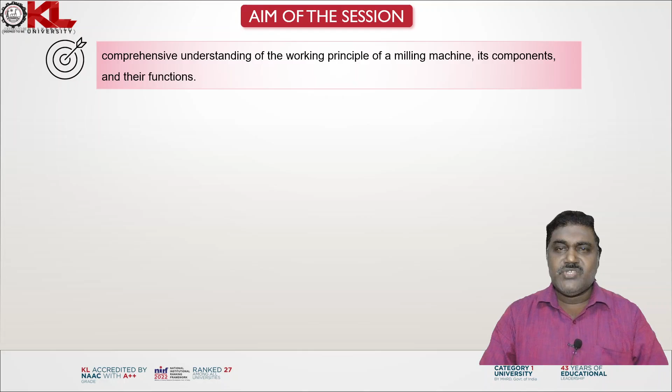In this video, I am going to explain the milling machine working principle. The main aim of the session: a comprehensive understanding of the working principle of a milling machine, its components and their functions. Instructional objectives: this session is mainly designed to explain the working principle of a milling machine, including its basic operations, and to familiarize participants with the various components of the milling machine and their functions.

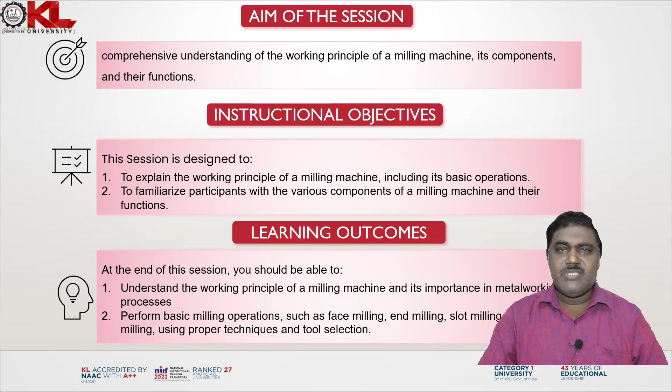The learning outcomes: at the end of this session, you should be able to understand the working principle of the milling machine and its importance in metalworking processes, and perform basic milling operations such as face milling, end milling, slot milling and profile milling using proper techniques and tool selection. Now look at this diagram.

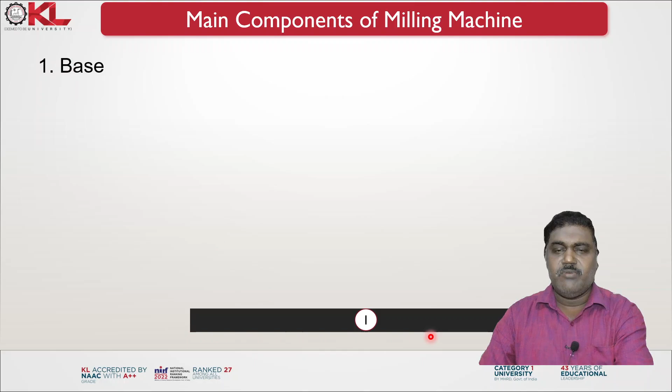See the first part, that is the base. This is the bottom part of the machine, the base, and the second part is the column. The column is mainly used for supporting the overhanging arm of the milling machine, and all the driving mechanisms are incorporated inside the column. It's supported on the base.

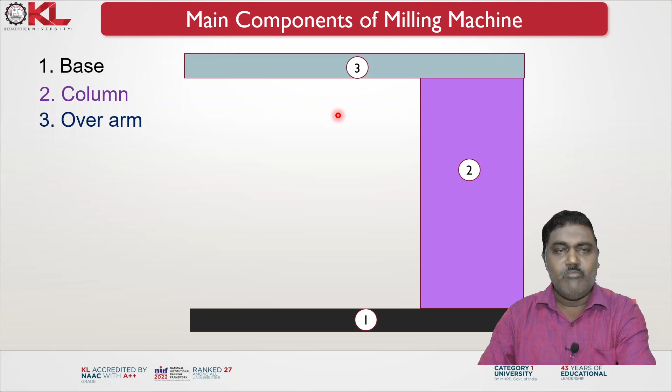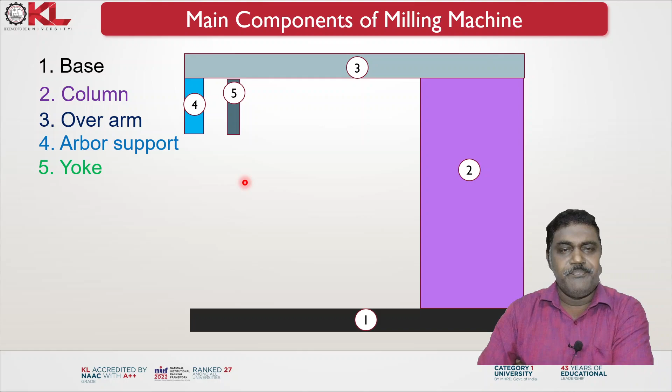Next, the overarm. Part number 3 is the overarm. This overarm is mainly used for supporting the milling arbor at one end, and the other end is supported at the column, and on the arbor the milling cutter will be mounted. Here there is the arbor support. This arbor is overhanging and is supported by means of this device. Here this is the yoke, which is used to support the arbor of the milling machine.

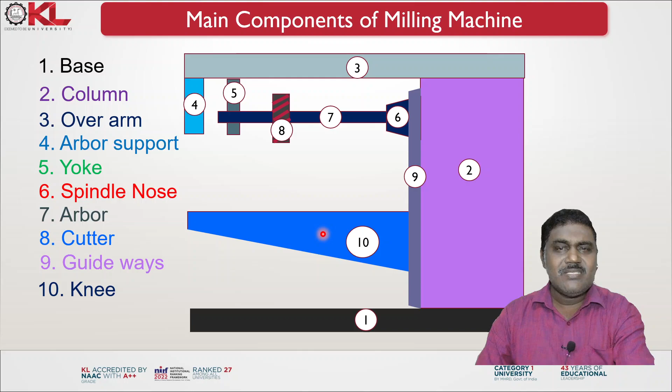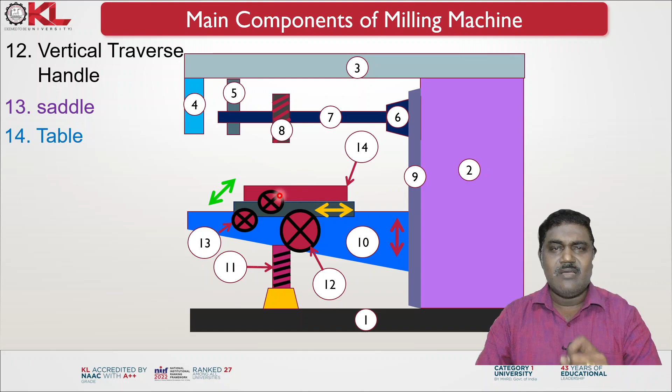Okay, now you can observe here the three directions: the vertical direction, horizontal direction and cross direction. So with the help of these three directions, you are able to accommodate any size of workpiece under the milling cutter, and you can move the work along the horizontal direction and cross direction in order to cut the workpiece to the required profiles. These movements are accommodated in the machine.

Now we can see that on the top of this table we are mounting the machine vise, where the job is fixed. With the help of this machine vise, fix the job, and you can accommodate different sizes of job. It's variable, because once this hand wheel of the vise is moving, it can accommodate more sizes of workpieces.

Once the workpiece is fixed, this entire setup can move up and down up to the tool with the help of this screw jack. I hope everyone understands how we construct this milling machine, and you are able to freely draw this diagram and identify the main components of the milling machine.

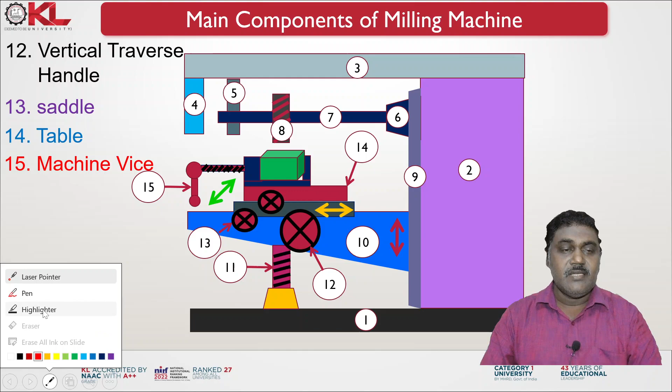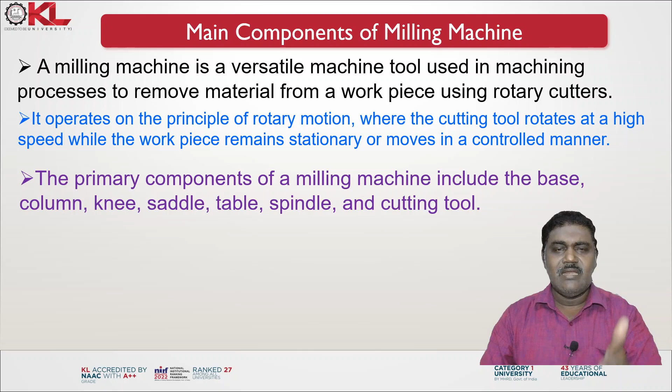Okay. A milling machine is a versatile machine tool used in machining to remove material from a workpiece using rotary cutters. It operates on the principle of rotary motion, where the cutting tool rotates at high speed while the workpiece remains stationary or moves in a controlled manner. The primary components of a milling machine include the base, column, knee, saddle, table, spindle and cutting tool.

Spindle rotation. The spindle is the main rotating component of the milling machine. It houses the cutting tool and rotates at high speeds. The spindle can be driven by an electric motor or other power sources like pneumatic or hydraulic are also sometimes used, but mostly they use the electrical power source, depending on the machine's design.

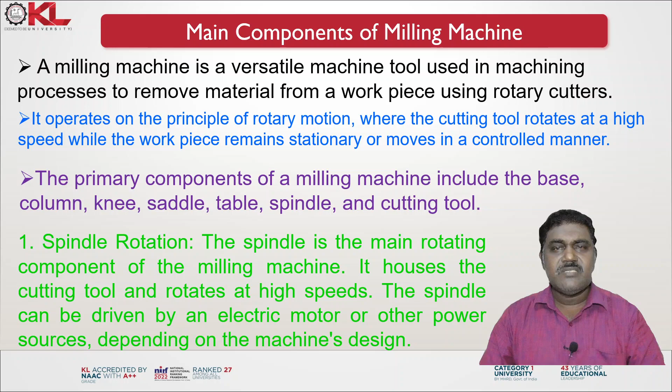Cutting tool selection. Milling machines use various types of cutting tools such as end mills, face mills and drills. The specific tool selection depends upon the desired machining operation and the material being machined. Based on that, you can choose end mills, face mills or drills.

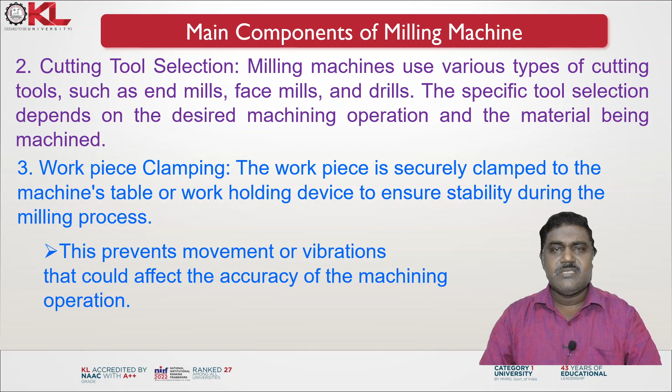Workpiece clamping. The workpiece is securely clamped to the machine's table or work holding device to ensure stability during the milling process. This prevents movement or vibrations that could affect the accuracy of the machining operation.

Feed motion. The milling machine provides controlled movement to the workpiece or cutting tool in three directions. Just now you saw the vertical, horizontal and cross direction movements. That is x-axis longitudinal movement, y-axis transverse movement, z-axis vertical movement. These movements can be achieved through manual operation or with computer numerical control for automated precision, that is the CNC milling machine.

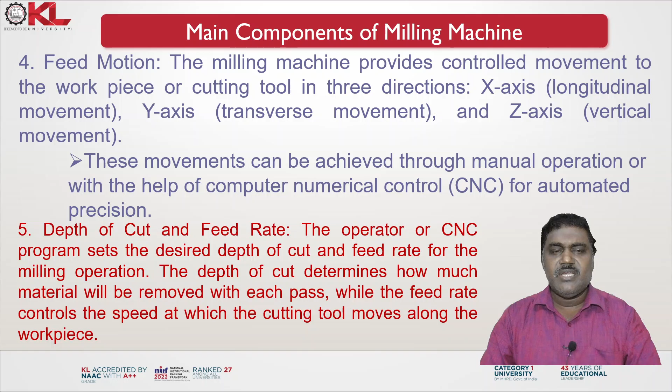Depth of cut and feed rate. The operator or CNC program sets the desired depth of cut and feed rate for the milling operation. The depth of cut determines how much material will be removed with each pass, while the feed rate controls the speed at which the cutting tool moves along the workpiece.

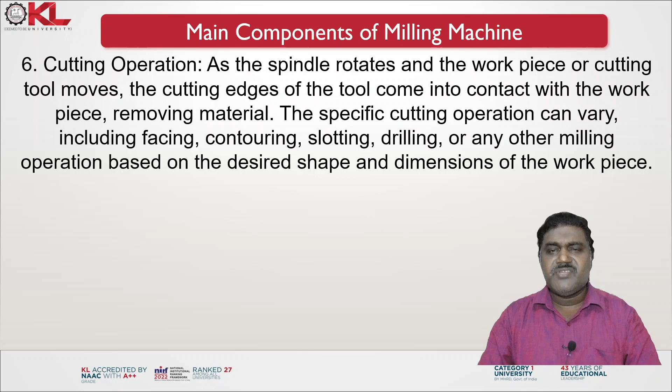Cutting operation. As the spindle rotates and the workpiece or cutting tool moves, the cutting edges of the tool come into contact with the workpiece, removing material. The specific cutting operation can vary, including facing, contouring, slotting, drilling or any other milling operation based on the desired shape and dimensions of the workpiece.

Coolant and lubrication. Milling machines often use coolants or lubricants to reduce heat generated during the machining process, which helps prevent tool wear and improve surface finish. Coolants can be applied through various methods such as flood cooling or through-coolant systems.

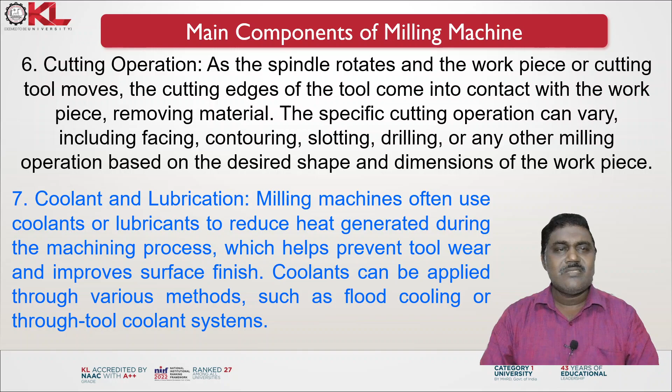Thank you. I hope everyone understands the basic components of the milling machine and their functions.